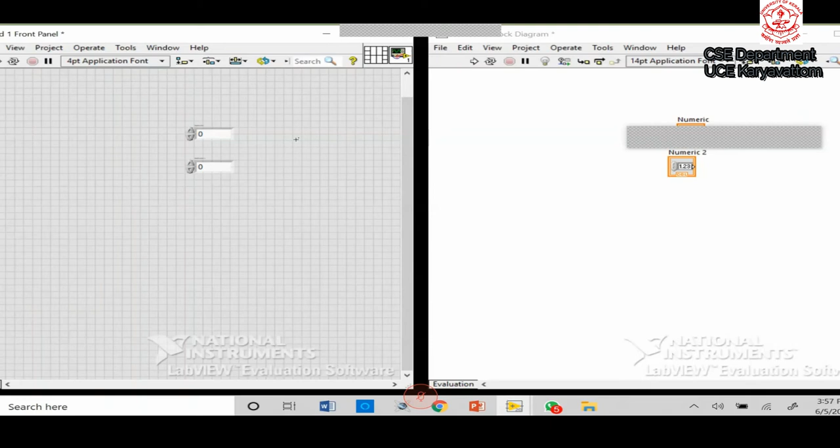After addition, we have to display the result in a numeric indicator, so I'm choosing a numeric indicator. These are the different things I will use for performing an addition using LabVIEW. In the front panel window, a minimum of 3 sections are there: 2 inputs and 1 output required.

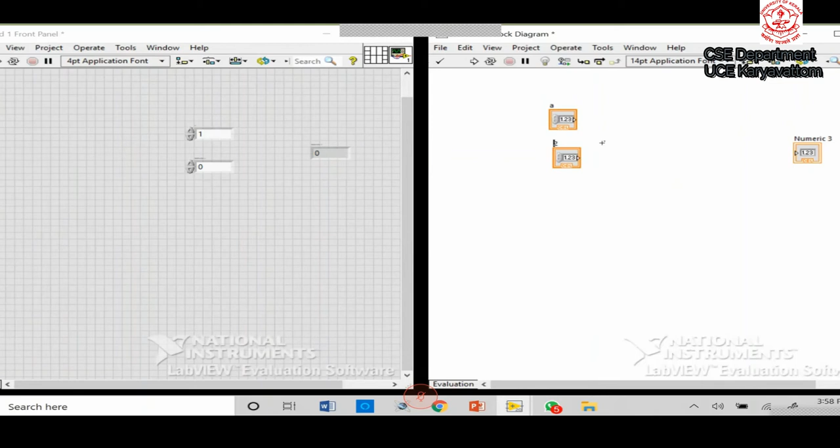After placing these front panel indicators or controllers, in the block diagram we have three numeric terminals displayed. The first one I'm representing as A, the second one can be replaced by the variable B, and this one is the sum. I'm just replacing the names as A, B, and sum.

The next thing is, inside this block diagram, we have to write a program. Normally, the two inputs and one output can be defined by these different variables, and these variables can be accessed through the programming itself, like in a C program. But we have to write this program to perform the addition of these two numbers using textual languages. In LabVIEW, there will be a special circuitry or graphical user interface instead.

For that purpose, we can just right click on that window, and you can see a lot of function windows. Actually, this window is called a palette. Normally there's no word called 'window' - in LabVIEW environment it's called the function palette. In the function palette, we have a lot of things available.

The first one is the structures, and another one, similar to C++, is arrays, which may be there as well.

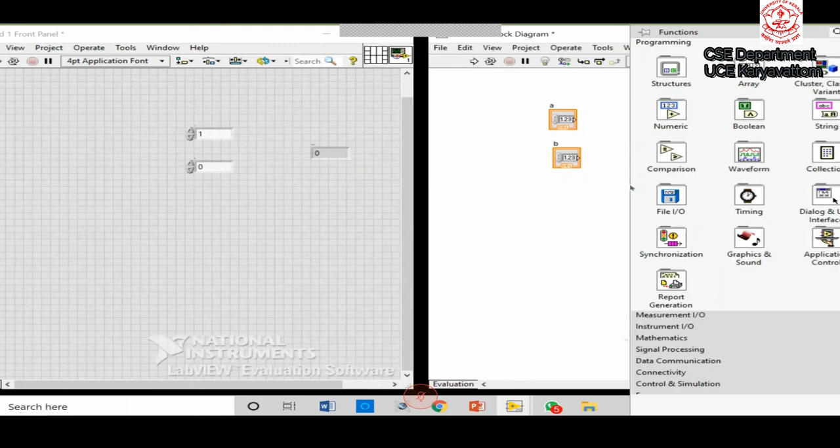Then Boolean things may be there, then strings, then waveforms. Actually, this waveforms and graphics is mostly used for your engineering level, your electronic and electrical candidates.

Our ultimate aim is to perform some additions. The addition, maybe our inputs are numeric. I have to perform this numeric addition. You can go to the numeric palette and select this add window. You can see that everything is available under this numeric application.

So I can choose this adder and place it in the block diagram. You can see that the adder is only visible in the block diagram, not available in the panel, because it is an input and output window, and it may not display this adder here.

The next thing is after placing these required elements or icons - this is the first icon - you have to wire the circuitry. Then I am wiring this A toward this first terminal, and B is given to the second input of the adder. Definitely A and B will be added.

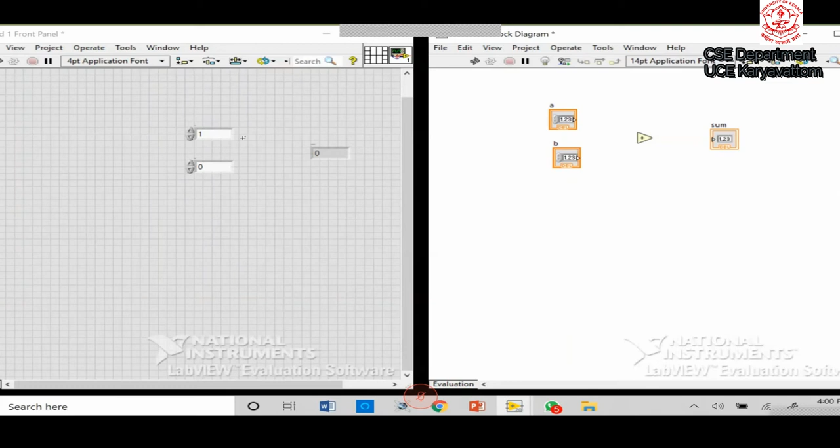If you want to display the result, you should wire this output of the adder toward the indicator. That is, A is your controller, B is also a controller, and sum is the indicator. Now your program is over for an addition process.

This process, you can run this program. Similar to every programming language, we have to run this program by using this window. I'm just running this program.

Now I am choosing this value. Both A and B is equal to 0. The result is 0 itself. I'm trying to change these values: B is equal to -1. 0 plus -1 is equal to -1.

Then I'm changing this value. B is equal to 4 and A is equal to 8, and 8 plus 4 is equal to 12.

That is, the entire addition program can be replaced by using a graphical user interface with a minimum of 2 input signals and an adder.

Similar to every industrial application, there is an individual block or icon. For example, if I want to perform the square root of a number, there is a special icon called square root under the numeric palette.

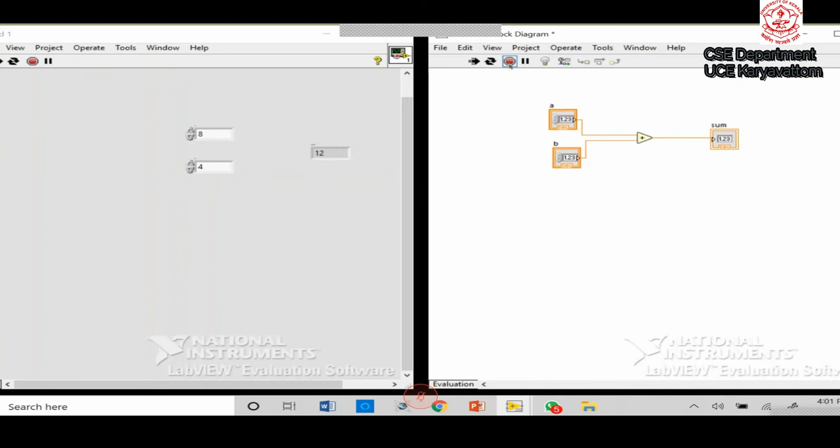I can stop this program and show you the different palettes available. For example, for CSE candidates, we can deal with string operators or string functions.

You can see that under the string functions, if you want to perform some sorting or concatenation of two strings, you need to write this program. You can go to the string palette and choose these icons.

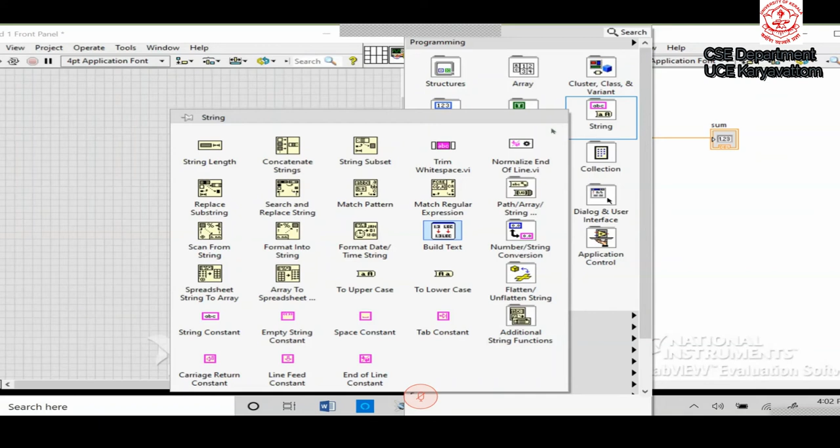The concatenation program - placing this concatenation, you can see there are two inputs, string 1 and string 2, and the output will be the same data type. If you apply the two strings toward this string concatenation, the output will be concatenated and displayed.

The only thing we have to remember is that without knowing these concepts of the programming language, we cannot be able to use this LabVIEW platform. For example, without knowing what concatenation of two strings means, we cannot perform the concatenation operation using LabVIEW. If you have enough basic knowledge related to this programming concept, every user can easily use this LabVIEW platform.

Similarly, for some other applications, I will show you the file input and output operations. You can see there is a zip icon there.

What is the need of the zip files? We have to apply a file that will be compressed into another file and save it. If you are using a Windows operating system or a C or C++ program, we have to download a WinZip or WinRAR.

Then only I can perform this compression for particular images, files, or any type of information. But using this LabVIEW platform, I can go to the file input and output operation, choose this WinZip application, and place it here.

Then what are the different, but we have to remember, but we have to know, what about the minimum requirements for programming this, for performing this WinZip or compression operation.

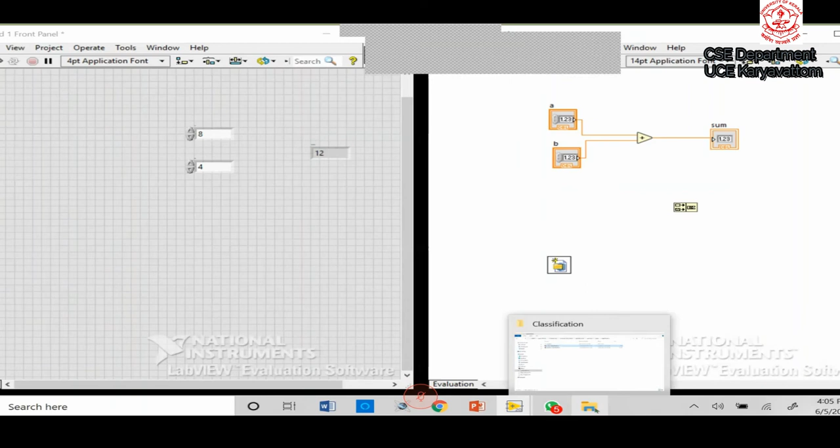Okay, I think we are getting some concepts of graphical programming using LabVIEW. Then I will show you one of the best real-time examples for you. I can show you some color classifications.

I think you can see this window. I wrote this program for identifying the color of these bottles, placed in different colors. I have to identify which bottle is having our required color. Okay, I will show you the entire program and the virtual instruments.

In this case, normally we are writing this program inside a while loop. I forgot to mention some functions. Okay, I can return to the program. Inside this structure, you can see this. Before going to this real-time example, we discussed the structures. Yeah, you can see these structure palettes.

We have different icons out there. Normally we start with sequential programming using C or C++. The first concept is the while loop, then for loop, then case structures, etc. Inside this structure window, the for loop is there, then while loop, then case structures.

Then in addition to this we have a lot of things, there are local variables, local and global variables, then shared variables, which are not new for us. We are more familiar with the concepts of local variable, global variable, shared variable, for loop, while loop, etc.

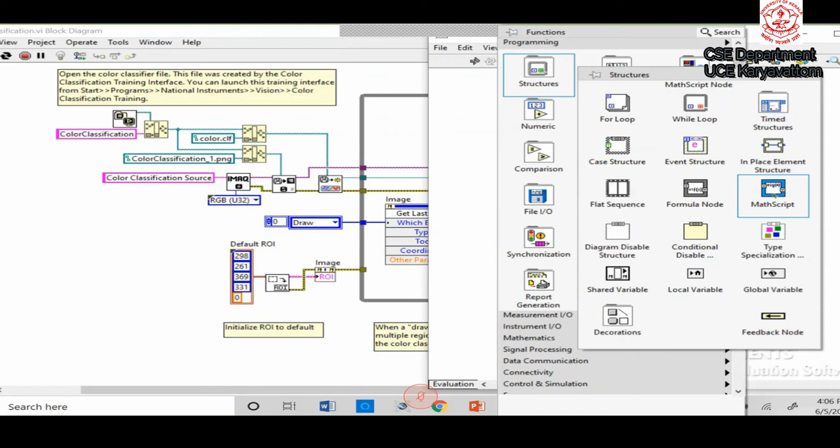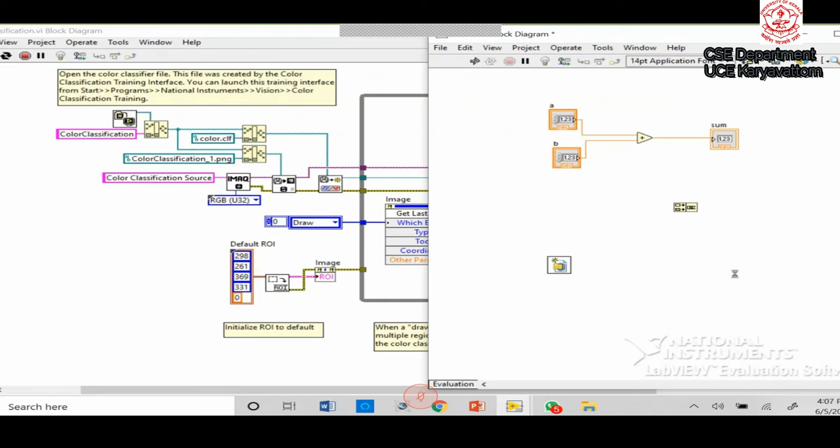That is, I have to choose the required function palette and paste it on the block diagram, and you can write this program. You can write MATLAB programs under this window, there is a separate window available for you. The MATLAB or math script files are available in your LabVIEW.

When discussing the basic features, it has multi-target and multi-platform support. You can write your MATLAB programs under these icons. If I want to write a C, C++, or C program, we can go to... I think there is some, I think it is not here.

Yeah, before that, another example is the flat sequences. Actually, flat sequences means sequential programming. For example, if you are dealing with real-time programming, a real-time scheduler, or a real-time operating system.

The concept of a real-time scheduler is that after successful completion of a task, we can enter into the second task. Then if the second task is successful, we can go to the third, if the third is successful, we can go to the fourth, and so on. By using this sequential programming concept, it can be implemented using these flat sequences.

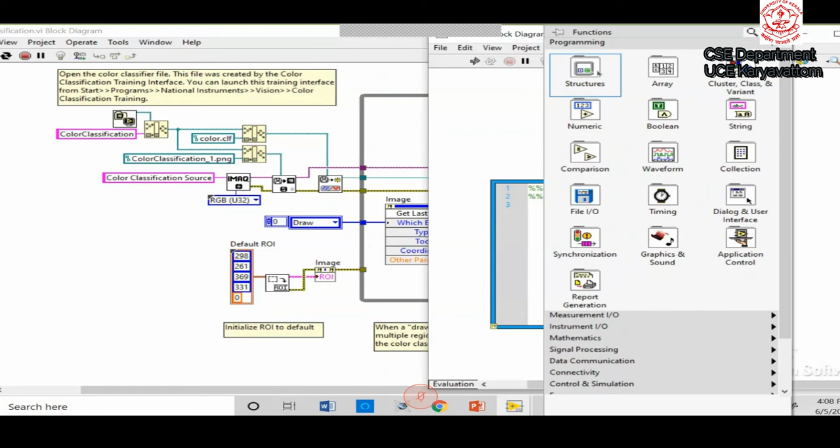We can apply n number of windows, similar to the math script file. In this example, we can see there are two windows. You can write the first scheduler on this window, and right-click on the program to add a frame after.

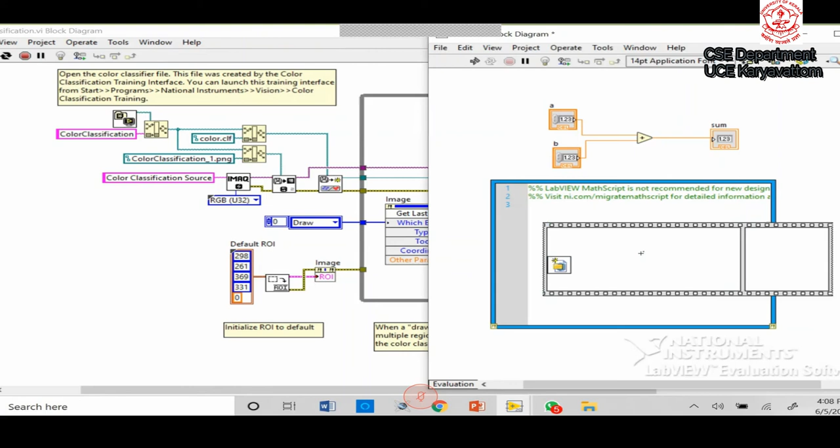I can add n number of frames, that is, frame 2 will be executed after the successful completion of frame 1. This frame sequence type of program is more suitable for real-time schedulers or programming of real-time operating systems. It is not only reserved for conventional or open source programs; it is very suitable for real-time operating systems also.

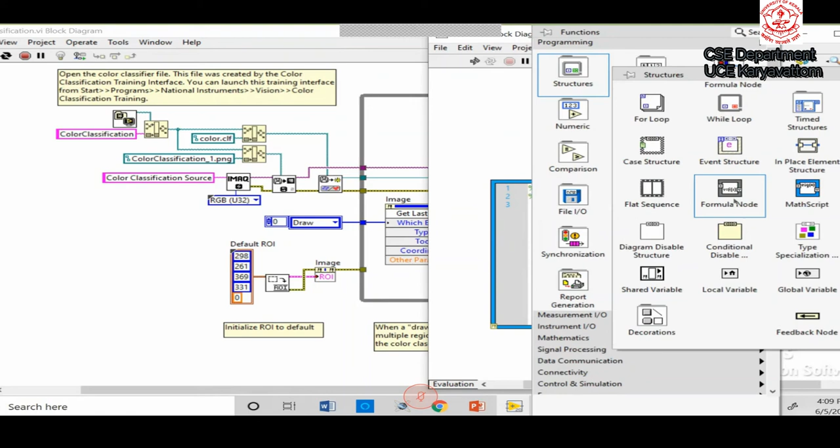Another important concept in this structure is the formula node. What is the formula node? It is a simple mathematical operation. We can assume we are having a simple program, like a C or C++ program, or a VHDL or Verilog program. We can write this program to perform addition under this window as 1 plus 2 equals something. After executing, 1 plus 2 will be displayed as 3, and so on.

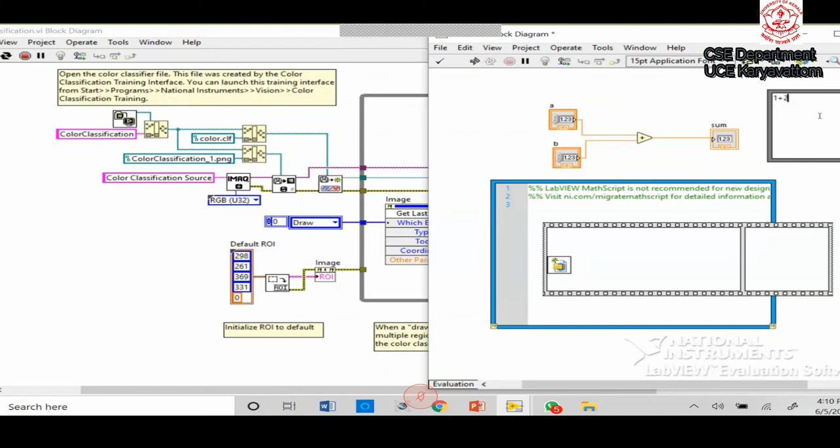Similarly, we can compare the performance of this window with Python languages or the Python interpreter. While reading with the Python interpreter, you just write the program step by step and it will be executed, because it is an interpreter. Similar to this, I can write a program under the formula node.

The event structure and in place element structure are most related to real-time operating systems. You can leave this basic concept and go to the color classifications.

In this example, you can see that the program will be placed in a while loop. Why are we placing the program in a while loop? That is the main loop. In C++ or C program, every program runs under the main function. Similarly, I place the programs inside the while loop, which acts as the main program.

In this example, I am trying to find some color by giving some values called the region of interest. Computer science people are more familiar with this. What is the region of interest? For example, I have to find where is your red color and where is your green color, etc. While dealing with the imaging system, the region of interest is something like that.

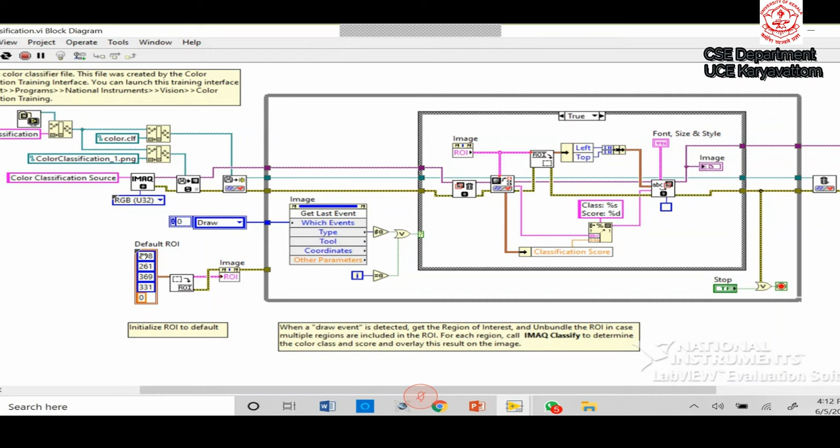Similarly, I have to give some files required for this color classification method. I am using a two color classification method, giving the region of interest. Inside this while loop, different files will be executed - supporting files or supporting icons required for the color classification method. We are trying to access the color classifications or images from this outside field. We know that once you enter this main loop, it will not go back to the outer loop.

These left side declarations are called the initial declarations. While we are running this program, it will not go back outside of this while loop. It will be executed only inside these functions, similar to the concept that once you enter this main loop, it will not quit to some other areas. Similarly, it will be executed or placed inside the while loops.

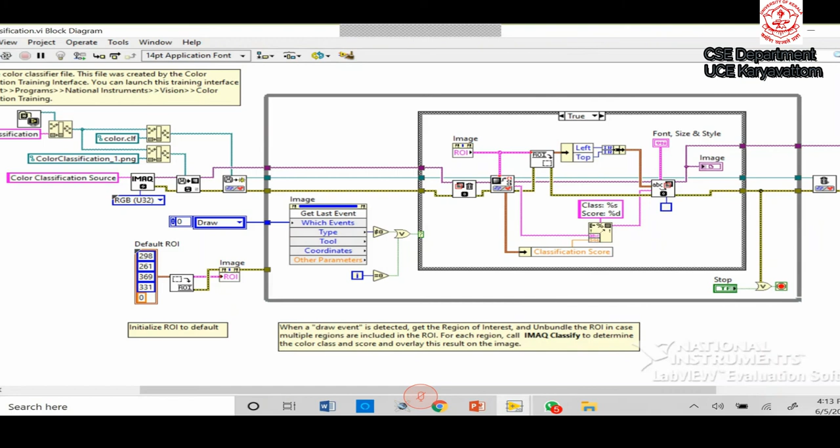Just for example, I will change the values of the CAN signals. This one will be 120, and the third will simply be 34, something like that. That may be some color variation or region of interest of some other color, I don't know which is your color. I will try to check which one is identified. When I try to execute this program, it is identified as a yellow color with a score of 870. That is, we have to change the region of interest.

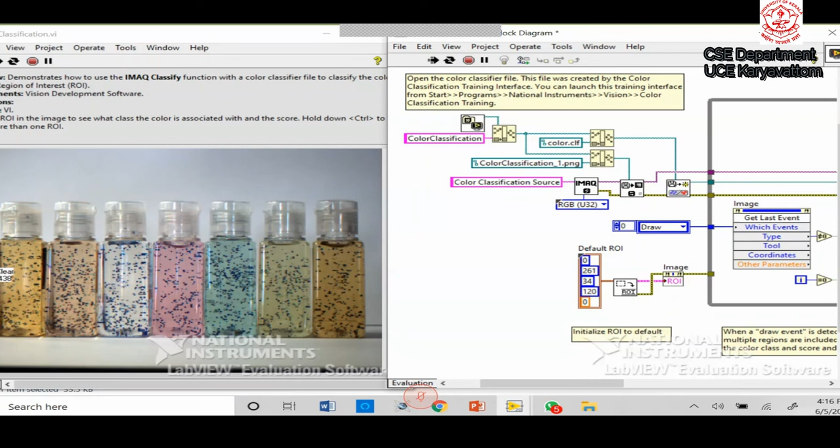So I cannot identify whether it's yellow, gray, orange, etc. Here I have 7 colors, but I can identify the classes. It's clear because this region of interest is more similar to the white signals. If I place 261 and 120 as 0, it will again enter another purely white area signal. Without knowing enough information, we cannot proceed. That is one drawback, but it is more suitable for industrial programming applications.

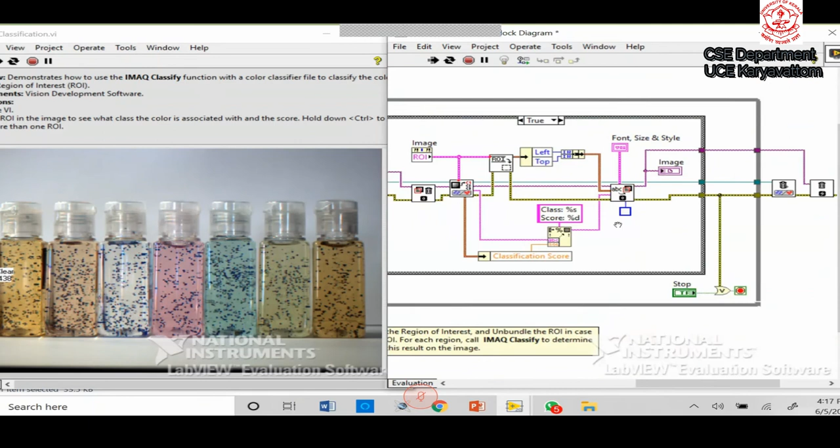I think we are getting some information about different image classification methods, image or color identification using LabVIEW. But I am not going into the detailed explanation of this VI because it is a too complicated procedure. I think by discussing it in order, we can get these concepts of LabVIEW or the virtual instrument engineering workbench.

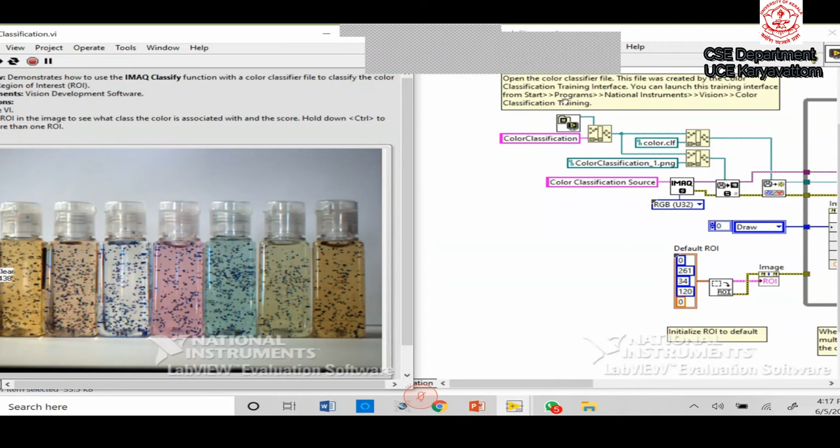Shall we move on? I will show you there is another interesting topic here, related to vision processing systems. Normally we deal with the deep learning concept. That is, we need not just write different programs for detecting barcodes, barcode detection, contour detection analysis, or some image filtering application. I'm trying to leave this and go to a deep learning concept using TensorFlow or OpenCV.

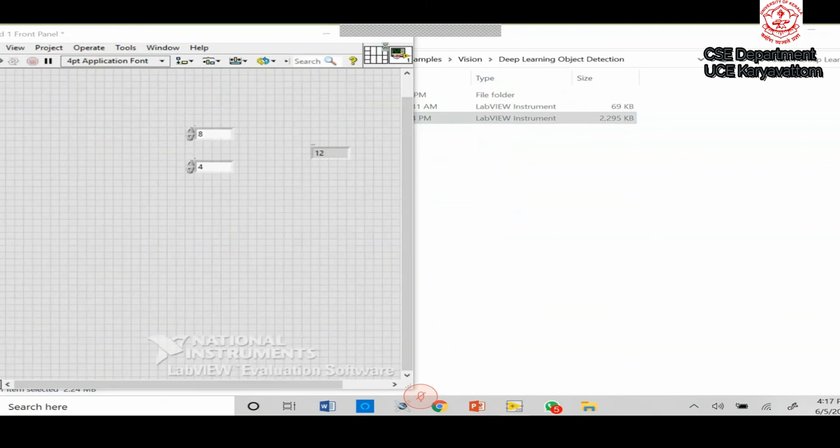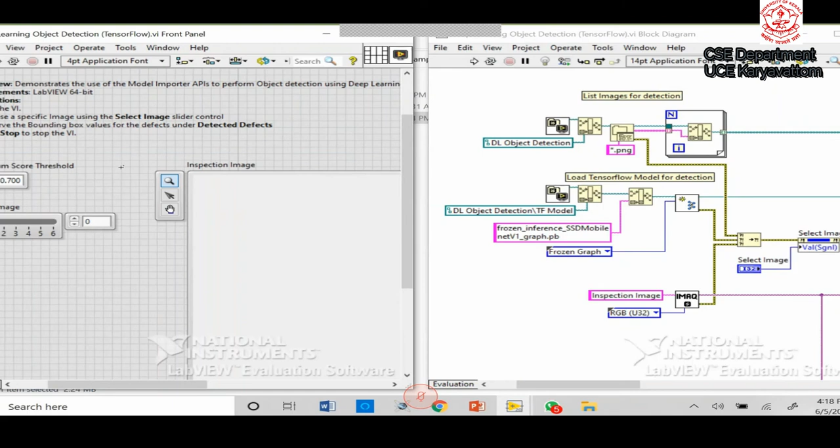We know that the concepts of deep learning or machine learning are, in this era, the best technologies used by industrialists or researchers. I will show you the applications of deep learning on the LabVIEW platform.

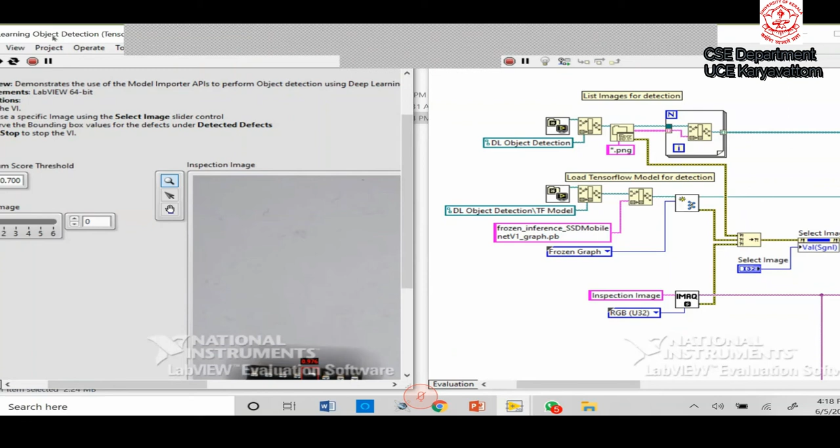That is a basic example. I'll show you this output as the first case, first level, then we can go further. I will show you the output window. This is a simple program for identifying malfunctioned IC bases.

I think electronics people as well as CSE people are more familiar with the IC base. An IC base has a socket, which we sometimes call a socket or integrated circuitry.

In this example, I am using a 16-pin IC pin base, and automatically I have to identify which IC base is in a faulty state. We can see in this example that I am placing a faulty stage at the 4th as well as the 10th pins of the IC. The first, second, third, fifth, sixth, seventh, etc. do not have any fault.

But the 4th pin is highly damaged, and the second one is moderately damaged. Your ultimate aim is to use deep learning or machine learning concepts to identify malfunctioned products using industrial signals.

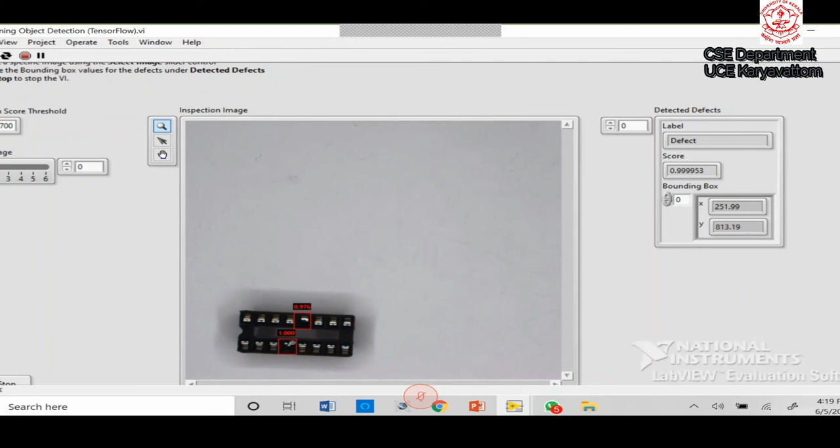Just running this program, it is indicated that the 4th pin is having 100% error, and the second erroneous pin is having an error level of 0.976, that is 97.6%. So this one is having 100% error, and this one is having 97.6%. By using this program, different types of images are placed for testing purposes using this deep learning algorithm.

I think we are more familiar with TensorFlow. Nowadays, if you're dealing with OpenCV, it is the best and leading programming platform for machine learning and deep learning concepts. I think the reason TensorFlow or OpenCV is the most acceptable platform for this research is that it is an open source programming platform.

By using simple hardware called Raspberry Pi or Jetson Nano, which costs a maximum of 5,000 or 6,000 rupees for a single board computer. Raspberry Pi is a single board computer with an operating system supported by either Windows or Linux. Nowadays, researchers have converted laptops or computer systems with graphical boards or NVIDIA graphical boards, replacing them with a single board computer called Raspberry Pi.

Another advanced version of the Raspberry Pi is a board called Jetson Nano. It costs near 8,000 or 9,000 rupees, but has an inbuilt 128 GPU core. Our laptop normally comes with a maximum quad core, and Raspberry Pi is also quad core, but for 8,000 or 9,000 rupees, this single board computer is available in the market supporting artificial intelligence and machine learning applications.

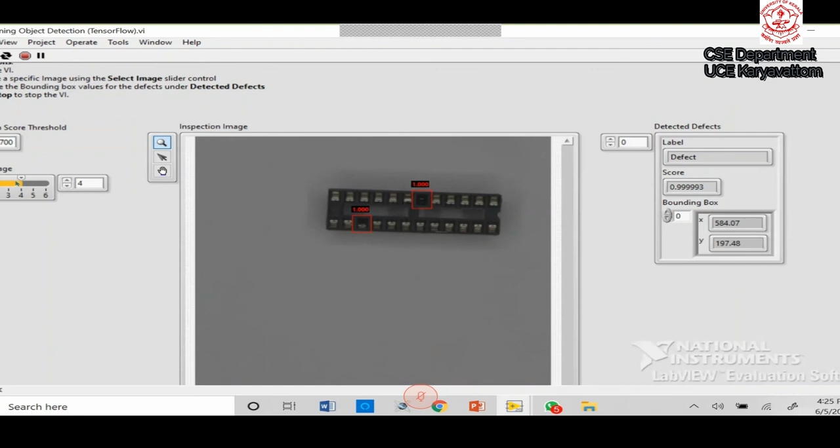That's right, similar to training a different number of IC bases, and it has better performance as per my program. I am trying to change this clarity as well as whatever the viewability is. It is providing a better output with my trained model.

Okay, I think it is needed to show this. What about the block diagram? It is a too much lengthy procedure. We have these areas that can be used to load your TensorFlow model.

We know the basic concept of a deep learning model is first we have to upload some trained model, and we can get some CSV files and train this data for n number of signals. It may be thousands of images required for your deep learning concepts.

By using computer platforms, we have to set this object or source, either from the lab, the hard disk drive, or some other removable devices, and we can apply different types of APIs required for performing this deep learning algorithm.

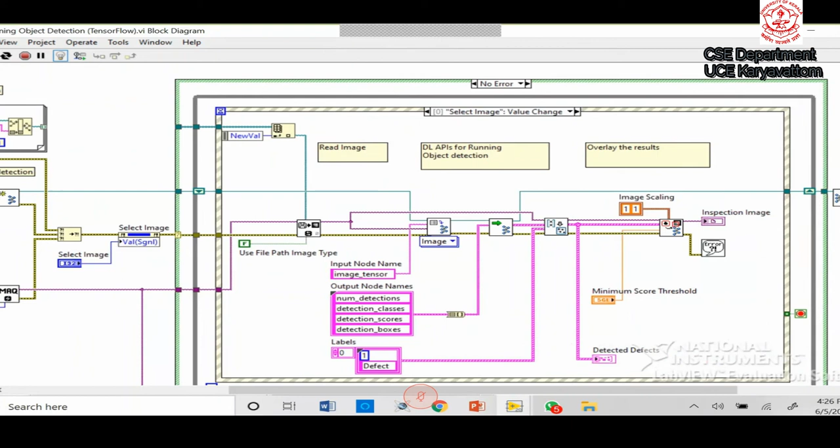That's right. First of all, for performing this deep learning algorithm or TensorFlow method, the ultimate thing is that we have to get enough information about image processing, then concepts of machine learning, concepts of artificial intelligence, etc. Then only can I enter into the TensorFlow programming platforms.

These steps are also required for using OpenCV or any type of textual language program available for deep learning. But compared to sequential or textual programming languages, you need not look into the entire signals or entire programming levels. For example, if I want to get color combinations or color identification using an OpenCV program, we have to write a lot of functions and programs for implementing the color identification.

But using LabVIEW, you can just take a single icon and configure that icon depending upon the region of interest. Only a single icon is required, and we have to be more thorough about how to configure that icon with respect to different input and output parameters. That means we have to get enough information about the theoretical part of deep learning algorithms and TensorFlow. That's it. But after getting this information, the programming is very easy for us.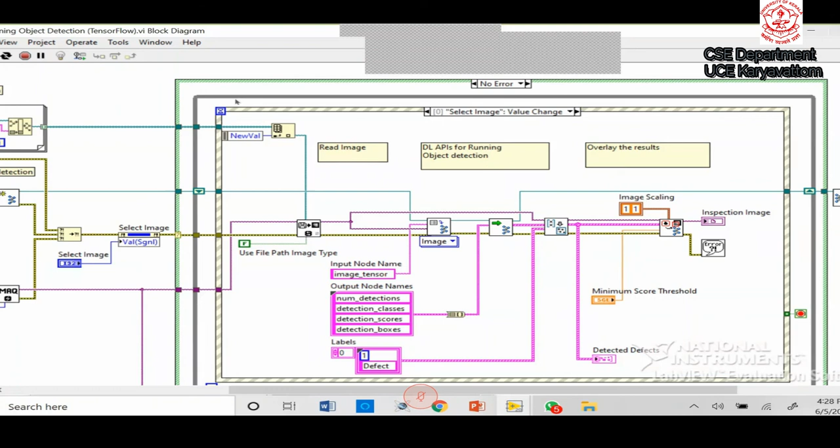These are some concepts related to LabVIEW platforms, or laboratory virtual instrument engineering, or virtual engineering workbench, used in lab, industrial, as well as scientific applications. This software is available free of cost. The student version is available from National Instruments, and these deep learning algorithms or machine learning algorithms are also free for us.

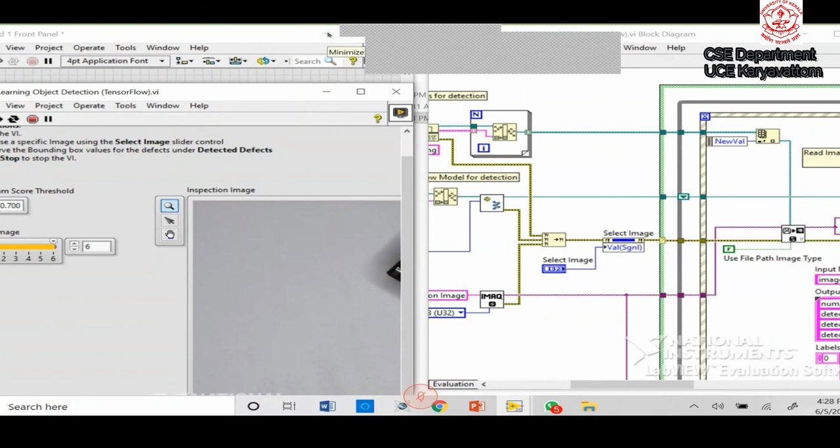You can try to, for researchers, maybe they have to purchase some additional packages for educational purposes, academic applications, or simple paper publications. You need to purchase this LabVIEW. But many blocks of icons or features are available free of cost using the LabVIEW platform.

I think we are getting some information related to graphical programming concepts using LabVIEW, laboratory virtual instrument engineering workbench. Shall I enter into the previous screen? Yeah, we can share my screen and come back to this slide.

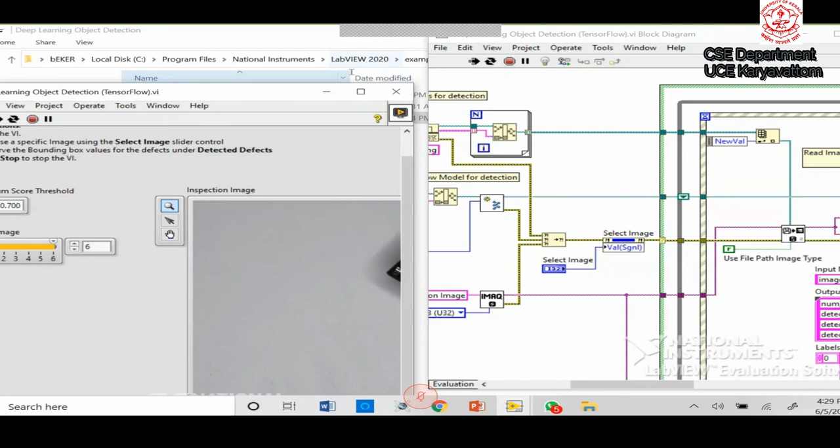Yeah, we can come back to these concepts of the analogy between LabVIEW. This is already completed, I need not discuss these applications again. We can see what different industries are supporting the LabVIEW platform.

The first one is Tata Consultancy, TCS. We can see what the application of Tata is. Already TCS is purely a software company, they don't have any hardware development. But the LabVIEW platform supports either C++, Java, or C programming concepts, or VHDL programs. Normally if you are writing 100 pages, I can represent 100 or 1000 pages of a C++ program into a single icon, which is more manageable for the programmer.

If a program is developed, for example a deep learning algorithm using C++, they can represent it as a simple function, a single icon. This icon can be copied to other computers, and without knowing much about the deep learning algorithm, a new user can configure this single block written by another person. It is multi-platform and very transferable to other programmers.

If you use a C++ or C program and transfer it to other programmers, it is too difficult to study what the first programmer wrote. But with LabVIEW, it is easy to identify and use a program written by other programmers.